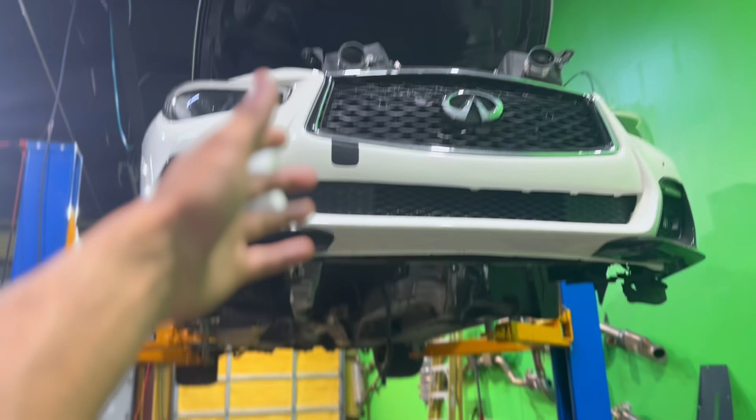Dan is one of our favorite customers because he wants to go even faster.

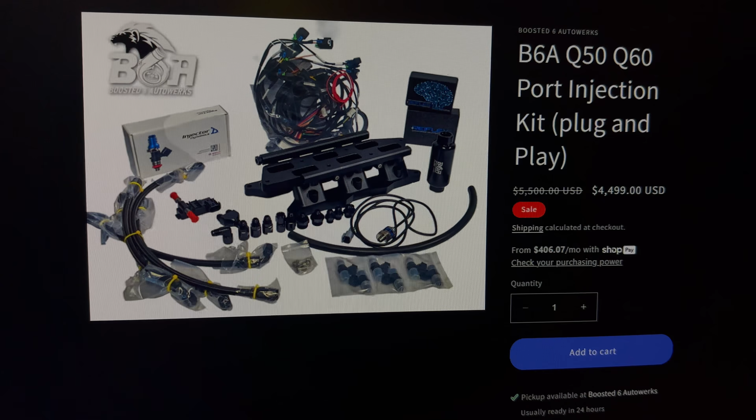Whenever you're trying to upgrade your fuel system, you'll usually need a low pressure fuel pump, but now you have two options: you can upgrade the direct injection system, or you can add port injection. If you don't know what port injection or reflex is, we'll go over that here in a second, but this car is pretty quick. He already had VRX70B turbos.

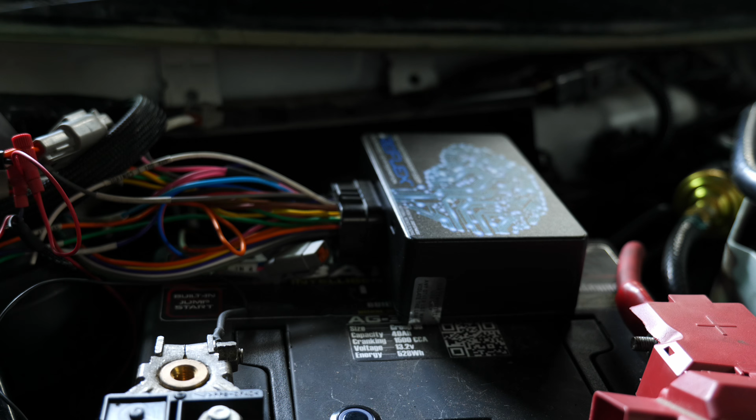This car will be getting the VRX80Bs, Motiv Reflex, and port injection. A lot of these guys upgrade the high pressure fuel pump over here and upgraded DI injectors that you can't really see right now, but they're in here.

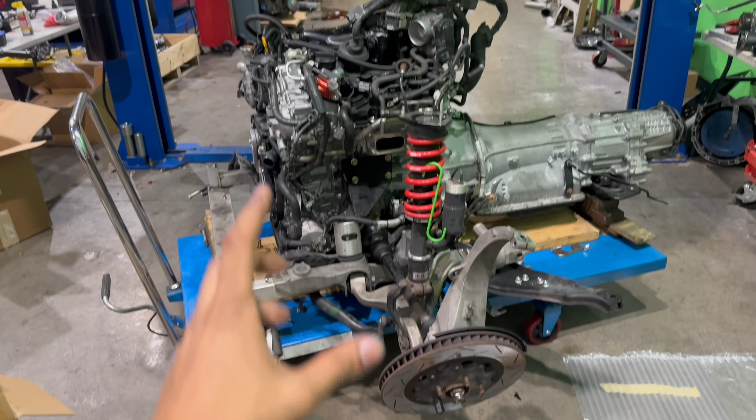So to install port injection on a VR30, you need a few bits. Lucky for us, we're working with Boosted 6 Autowerks.

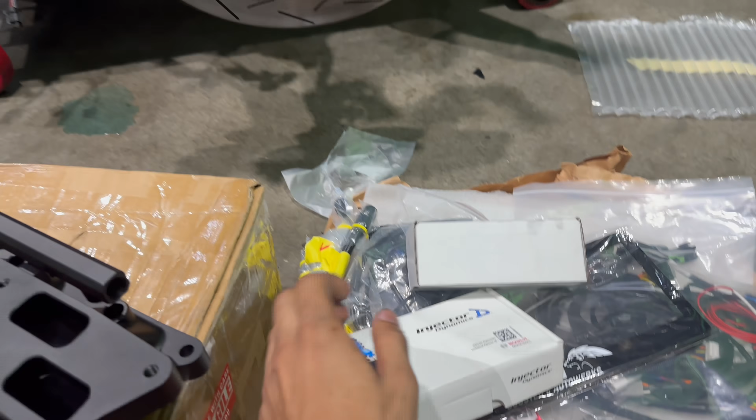This lower plenum is going to be integrated with our port injectors, so this is where those go. We're going to be running a set of ID 1050 port injectors. These will sit in these gaps here. These are all of our fuel lines. On each end of this fuel rail, we've got a point for AN fittings, which are all included.

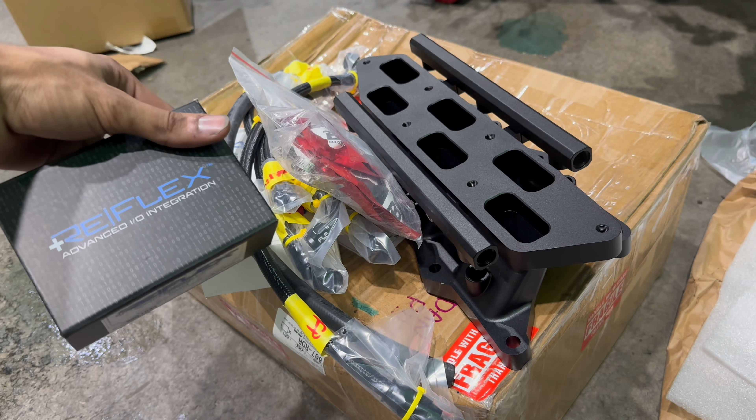Some additional hardware to install. We have a Motiv bar pressure sensor. This is where the magic happens. This is a Reflex Plus unit, and this is what actually controls all of the port injection, and it's that little box that you saw in the engine bay.

And the wiring harness, this is how you connect everything together. You've got things like your plugs for your injectors here, as well as some additional stuff to be able to communicate. This harness will plug into this box and then branch out and then plug into your port injectors.

So we'll go ahead and get all of this unboxed and unwrapped and installed with these VRX80B turbos.

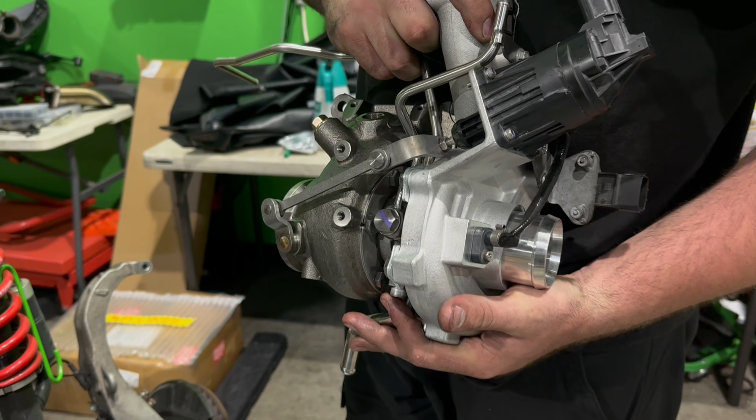We're installing the VRX80s now on this car. You'll notice the lines for coolant feed, return, oil drain, and then oil feed are going to be put on. You need to install these before you bolt them onto the car, because how are you going to access this inside banjo bolt once it's against the block?

Turbo speed sensors on. If you had an EGT sensor, it goes here, this car doesn't, so they come with block off kits. Obviously wastegate. Yeah, these turbos look really nice. So a little bit bigger than the 70B turbos.

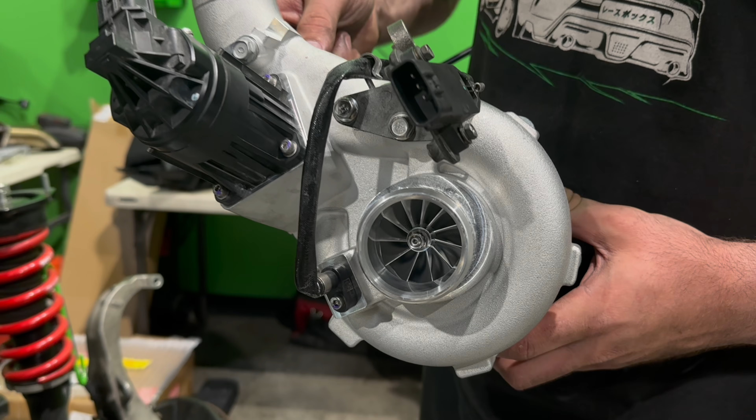Nick's got this thing all ready to go, and we'll get this installed on the car next.

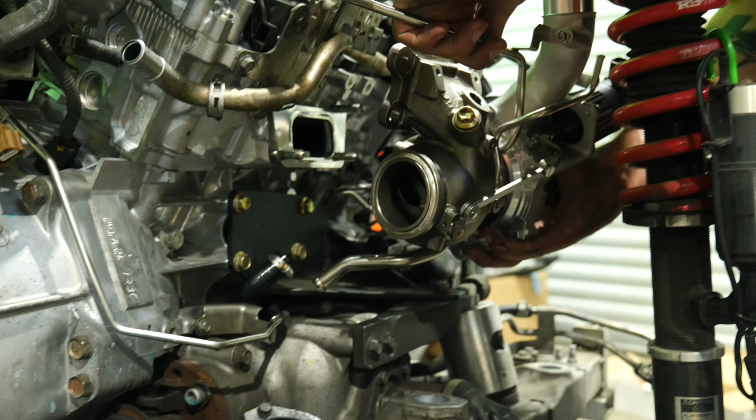We got the VRX80Bs on.

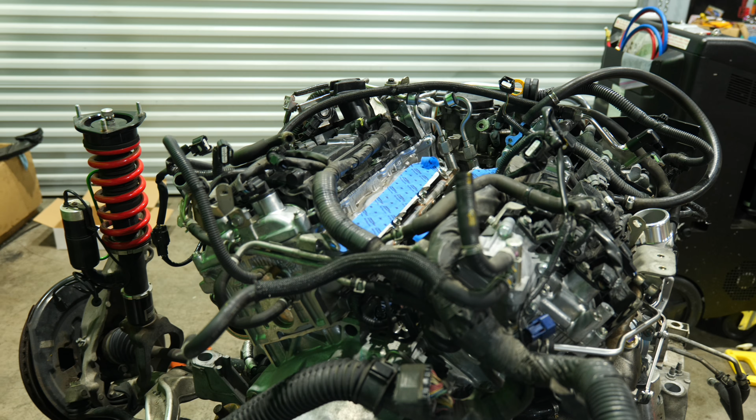So we've started this assembly. We have the lower intake plenum removed. We are working on the new one, getting the ID 1050 port injectors put in. We're just lubing them up.

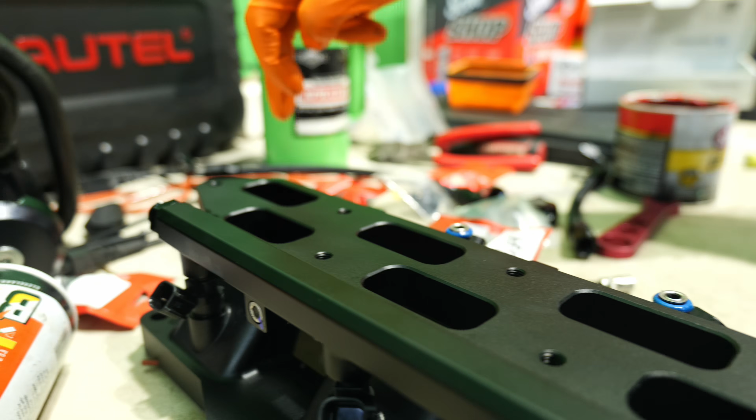The goal is to have fuel feed into here, wrap 180 degrees around to this rail, and then to your sensor here. It's a returnless system. There's no fuel return. Nothing too complicated, really.

This is supposed to be the front of the car. This will be the front of the manifold. The way you can tell is look at the gap here between this intake runner, then look at the back side here. So there's a larger gap at the front of the vehicle.

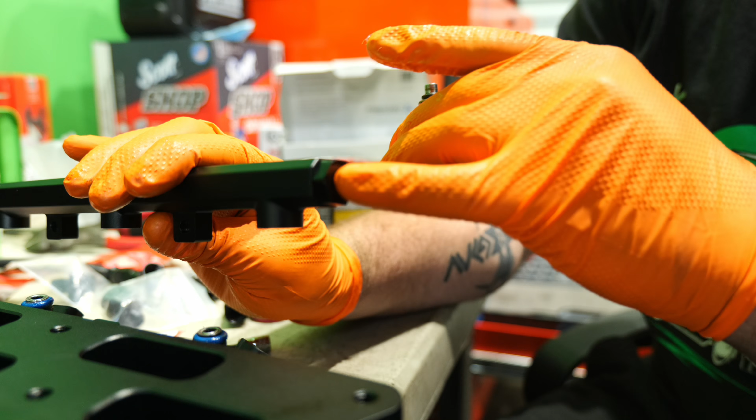This -6 to -6 ORB fittings, there's 3 of them. You're going to install one here, there. This fitting is a 1/8 NPT adapter for your Motiv ReFlex fuel pressure sensor.

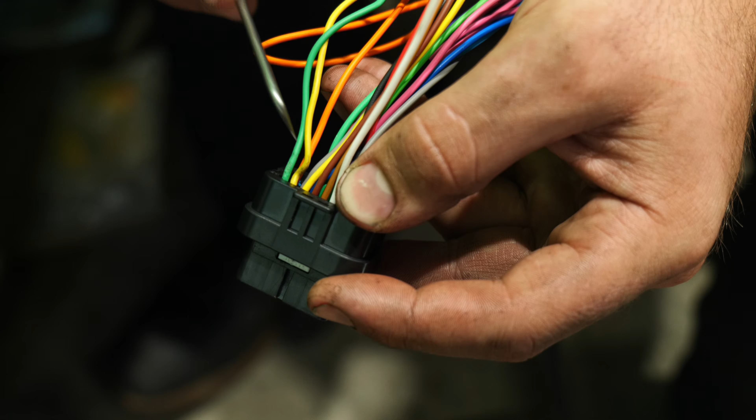This is the wiring harness, and there's one small step that you have to do. You need to swap these 2 lines. I've already done it. These yellow and green twisted together wires are CAN high, CAN low. So what you have to do is swap it like how I have it now. You're going to move the yellow from here to here and the green from the inside to the outside.

White plastic piece here, you're going to push in. You hear that audible click. So now every single one of these pins is unlocked. Be careful and just pull it out, vice versa. You're going to reinsert, push it all the way until you can see the metal ring. This white plastic piece won't even close if you don't push it all the way through. So you push it all the way in, click these pieces in, and that is how you depin and repin for CAN high, CAN low.

They are in the wrong spots for the Qs. This is one of your main connectors that goes to your actual reflex box. So CAN high, CAN low is swapped on this connector. Gotcha, so we just switch it back.

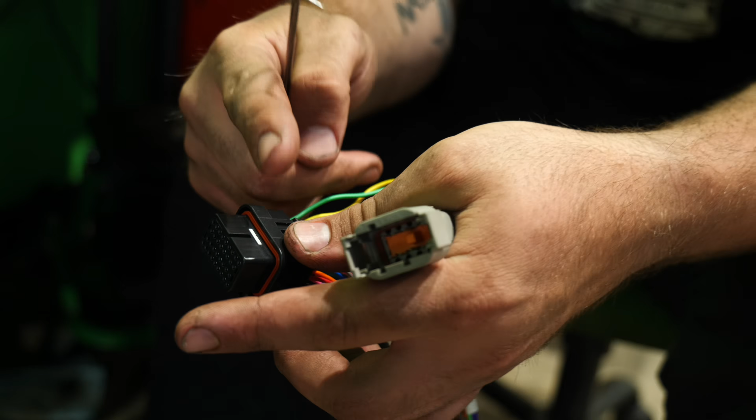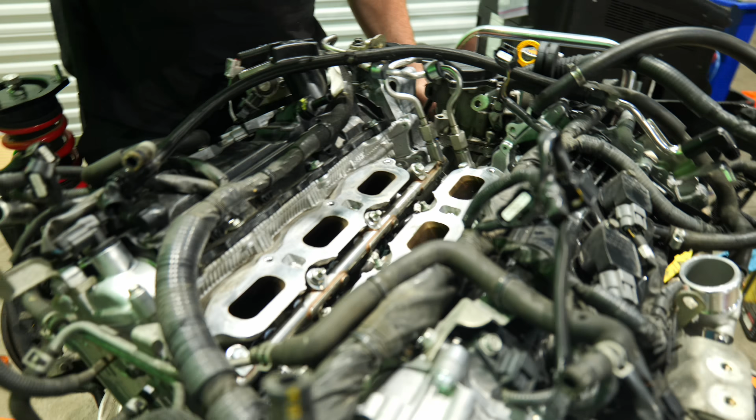Just getting ready to throw this bad boy on. Yep, these holes are what I call the bolt collectors, great place to put all your hardware. But real serious talk, make sure when you reinstall this, you install the gaskets, and then you just kind of place it on there.

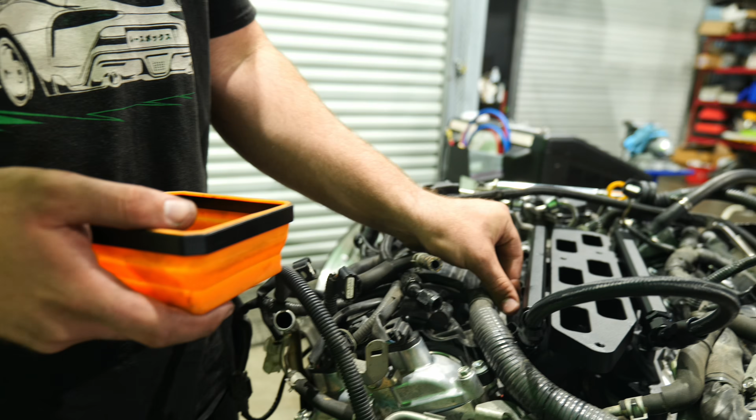Try to line it up, and you can see the holes align. Then we're going to tighten these all evenly and torque them down to spec. You're going to reuse your OEM lower plenum bolts.

So we have our motive harness, and we're starting to plug everything in. These are the injectors.

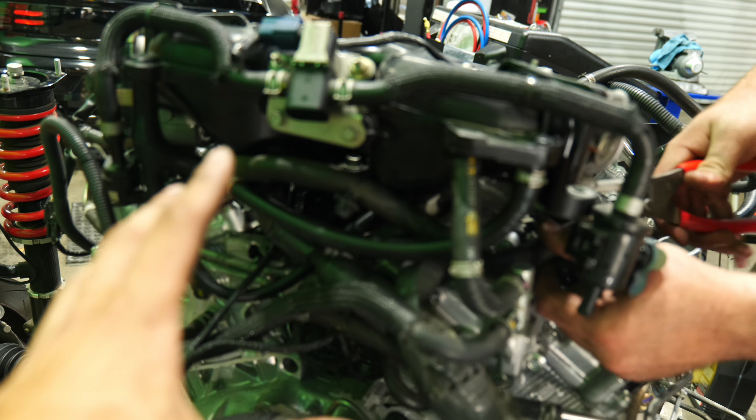I ran the coolant line a little bit farther out so it doesn't get crushed. Our fuel line is right here, and we've got our coolant line ran across it. A little bit of a tight fit, just mess around with it a little bit and you'll be good.

Dan's also running our upgraded race box pulleys, so we're gonna dyno this thing, and it's important that we don't shred any belts, so we've got these on here. If you have a VR30 and you keep shredding belts, make sure to check out our website for these. We've been selling these super quick.

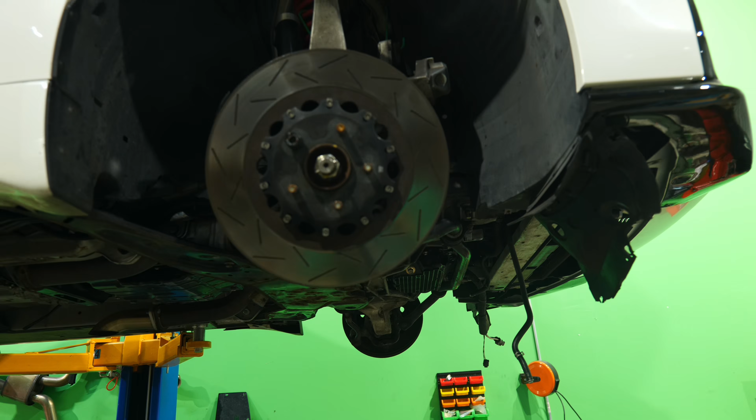All right, we've got the subframe back into the car right now after getting the VRX80B turbos thrown on. Just getting things wrapped up underneath here. We're gonna finish the rest of the motive install once we bring the car down, so you guys can have a better view of what we're working on. Once it's all put back together, we'll throw it on the dyno and see what kind of power we're making.

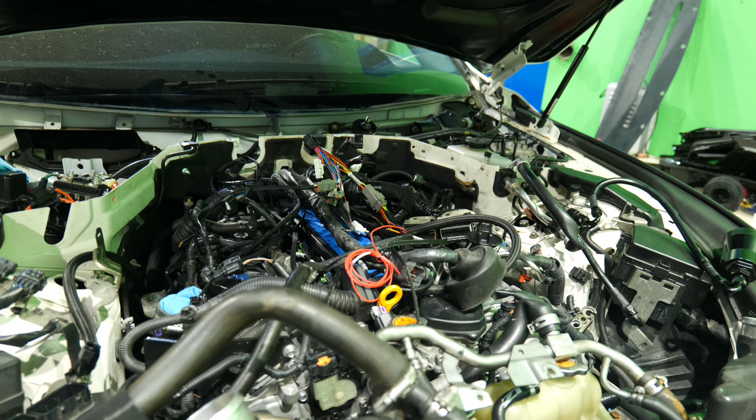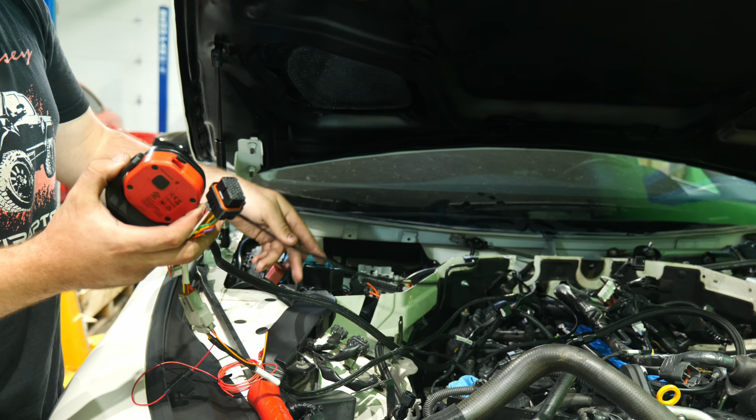We got the Motiv harness pulled through the back. Here is mostly the Motiv harness. This will include all of your jumpers and then your CAN bus connection as well as your flex fuel connection here. I'm gonna try to tidy it up and run it back here below the cowl.

I already have these jumpers installed. They're all labeled, so it's pretty easy. So this one is the MAP sensor. It's a lot like BMWs, if anybody's a BMW guy, for Motiv ReFlex.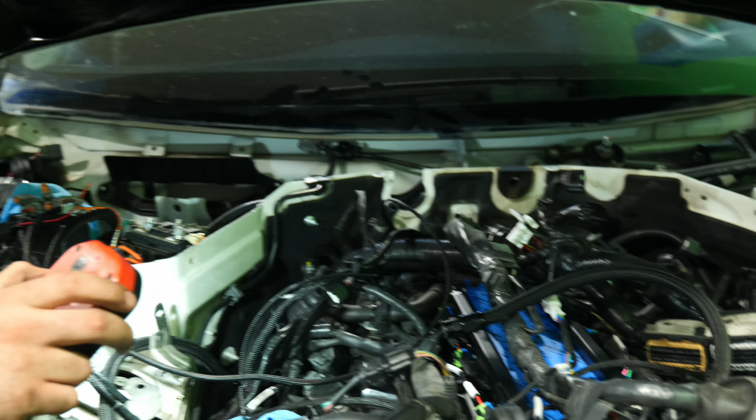We hijack the map sensor, we hijack the crank position sensor, and then you see this exhaust cam connector right here, we hijack that. And then we get CAN bus from the IPDM right here. And then flex fuel, the connector runs all the way to the flex sensor over there. If you are following the rules and instructions, your kit will come with a new flex kit that'll be installed right here from Boosted 6.

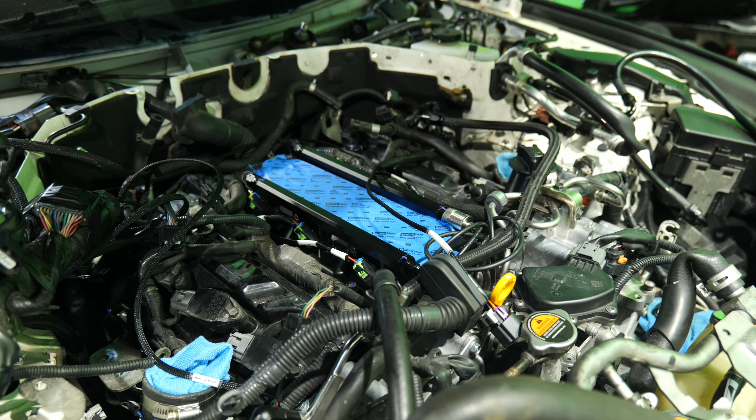We have a feeling that port injection is going to be pretty popular on the VR30 platform now. If this were your car, would you do the DI upgrade still? No, port injection in process. This is what we're talking about here. You guys know Dan Vu. He ran the 5.2 on the street on the VRX70s.

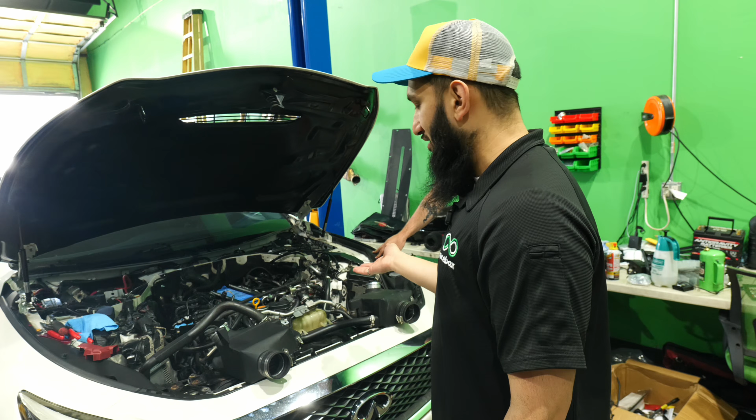He's always upgrading it, and so he's doing the B6A port injection kit. I wanted to just do a little talk about why we're switching him over to port injection, because he has everything. He had the full DI setup. Now here's the problem, right?

And this is the same thing on BMWs. I am first of all very, very grateful that we had the DI support on the VR30 platform that we did for all of these years, because we would have never gotten as far on these platforms if we had not had that.

Having said that, PI is like unlimited fuel. Real talk, you can basically just keep upgrading your low pressure pump and upgrading your PI injectors and get as much fuel as you want. Once you get really high on DI injector sizes, you start losing drivability, you start having random issues, they get really expensive, and eventually your injectors outscale your high pressure pump, and that outscales your low pressure pump. With PI, it's just injector, low pressure pump.

With DI, it's low pressure pump, expensive DI injectors, high pressure pump. So you're already saving money that way. So if people come to us now and ask, hey, my eventual goal is like 800 horsepower, we're just gonna tell you to go PI from the start. At the power levels we're pushing, because PI gives you that unlimited capacity, it's safer.

And the reason I say that is even with the best DI upgrades out there, at 800 horsepower we're limited to E50. So you would just go straight PI, because you can run higher E content, you're getting more charge cooling out of it. Safely, depends on how you're tuning it, right?

EcuTek finally gave us RaceROM 6, which gave us custom maps, which allows custom inputs on the CAN bus. What that allows is, while we don't have direct control of the PI and integrated flex control like we do on the BMWs, what we do have is safeties.

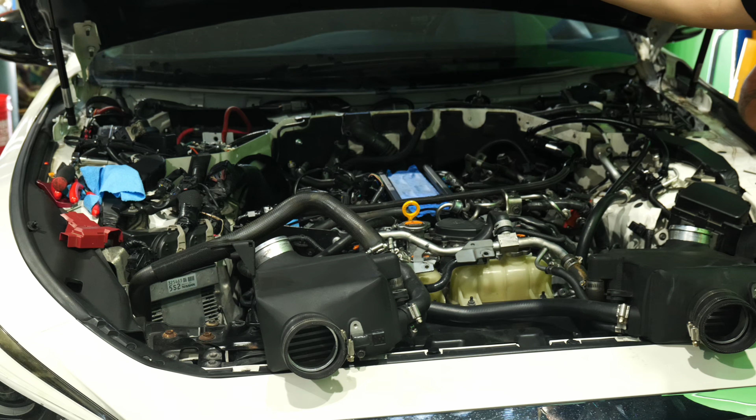4s on the street, Dan, I want 4s on the street. Once you run full PI, I don't want any excuses. Yeet the car. All right, that's all I gotta say about that.

Yo, bro. Just practicing, that's all.

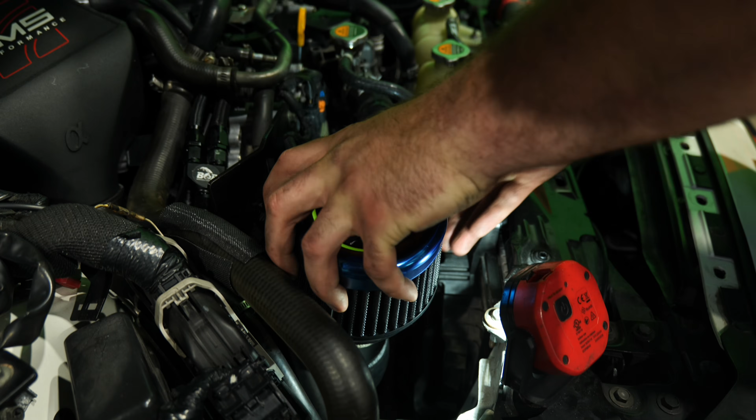We just want to make sure it starts with no issues.

Great first start on this car. Fuel trims are great, I mean really not a big change. You gotta think this car had VRX70s beforehand, so really idle and drivability is not gonna change much until it gets into wide open throttle boost.

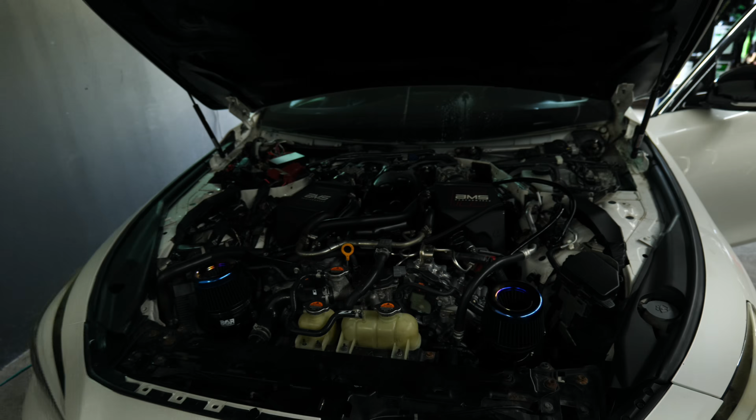We've got Dan's PI all installed with the new VRX80B turbos, and we've got it in the dyno room. So we're gonna go ahead and get our base map flashed. This car is still stock engine, so we will likely hold it back just a little bit for the sake of longevity and reliability. But you can see here, these are the new boosted 6 intakes, finished in neochrome.

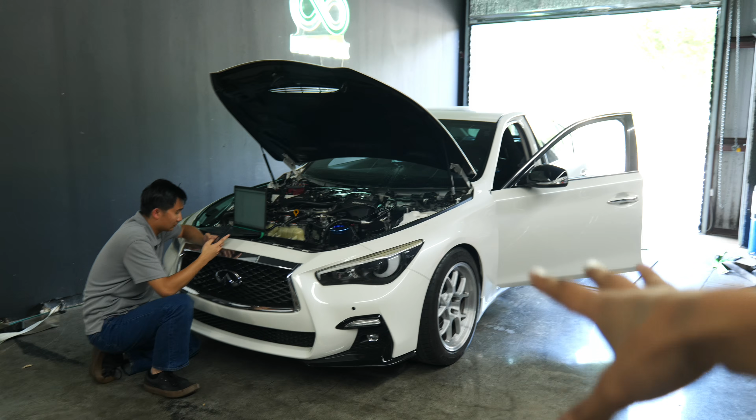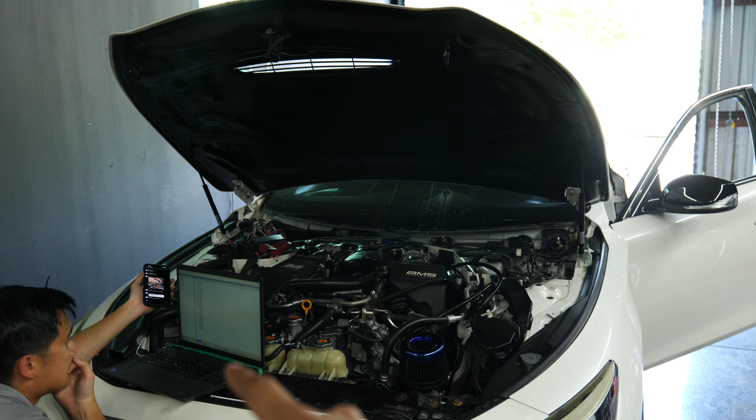Before we run this car on the dyno, there's another thing we can do with our laptop over here via Tuner Pro. Hook your computer up to your reflex before you do anything to make sure that you're actually getting a reading from everything that we installed. Our ethanol content sensor is now hooked up to our Motiv Reflex. We can double check on the computer to make sure we're getting a reading there, and that'll verify that our wiring is correct and that the reflex is working too.

We verified that our reflex is working and we are good to go to start dyno tuning. Alex already went ahead and filled it up with some E85, so we're good to start doing some pulls.

Right now, that first pull with pretty much no boost, no timing, just to make sure everything's working properly. All right, we have a new bin file, aka tune, for the reflex, loaded onto Dan's car. Now we're gonna start turning it up.

We just did another pull on medium boost and things are still looking good, so time to turn it up.

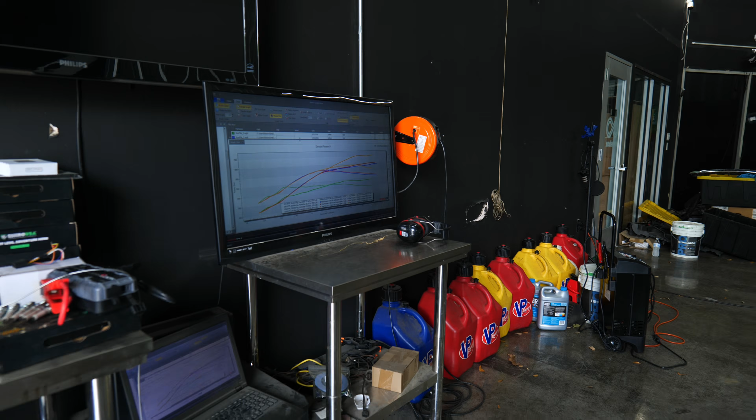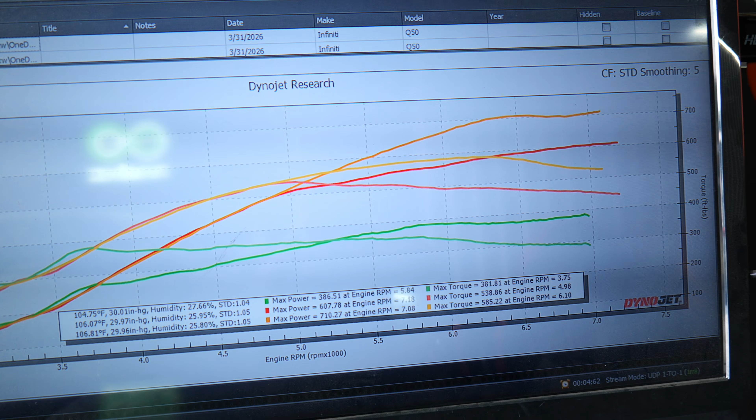Dang! That's already over 700 wheel horsepower on the VRX80Bs. We're still working on our boost right now, so this isn't the finished result, but you can tell right now that these VRX80Bs love to rip.

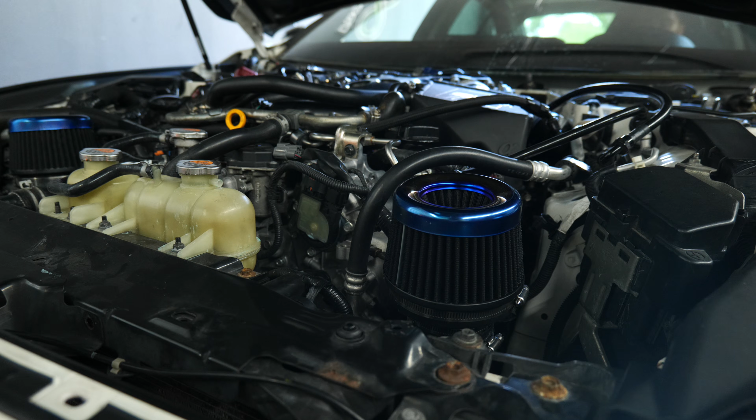You ready to see some rods fly out? Oh no. Let it ride.

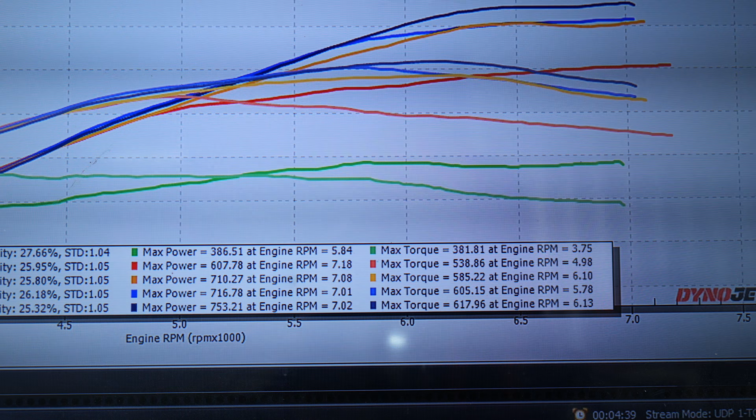That is 753 wheel horsepower and 618 foot-pounds of torque. And these VRX80s are eating up top.

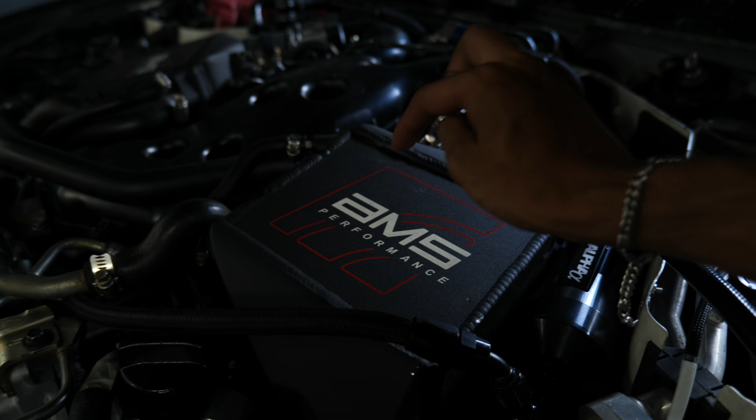750, boy. Hell yeah. It sounded pretty nasty up top. And I have my hand on the intercooler. That's a testament to how cold this thing still is, even though it is 107 degrees in here.

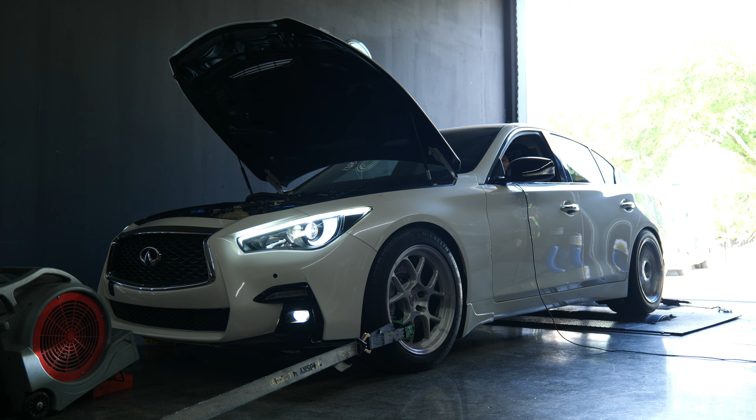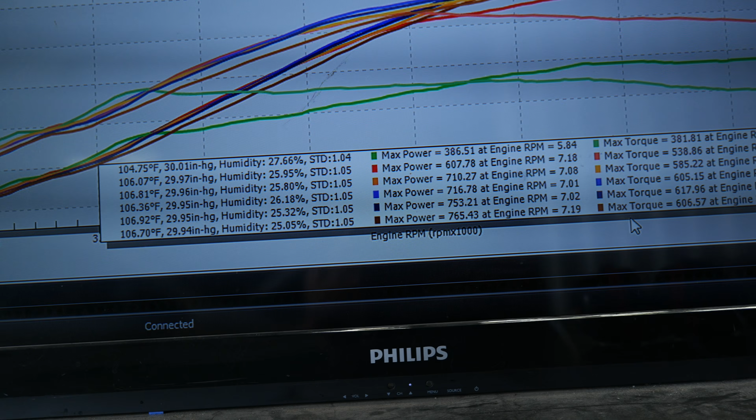About 107 degrees on that pull, even with the garages all open. But we made 765 wheel horsepower and 606 foot-pounds of torque. So you can see that VRX80 still eating up top. Pretty flat torque curve too, you don't really see it drop off after it spools up at about 4,000 RPM.

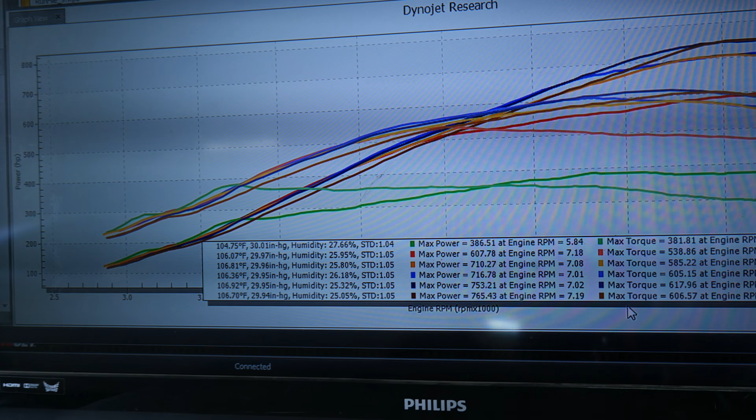But yeah, we're showing you everything. We're showing you our temperature, our ambient pressure, our humidity, and our correction factor, everything. We're not gonna hide anything.

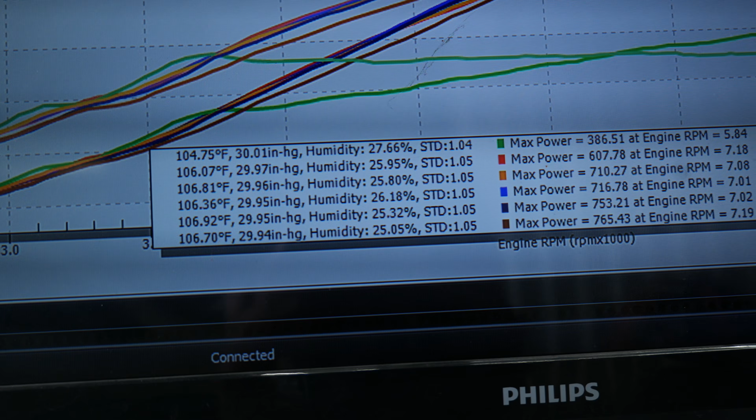And there you have it. After a full build breakdown, explanation of what everything is, and dyno results, we're proud to show you can make over 760 wheel horsepower on the stock motor and stock transmission in a Q50.